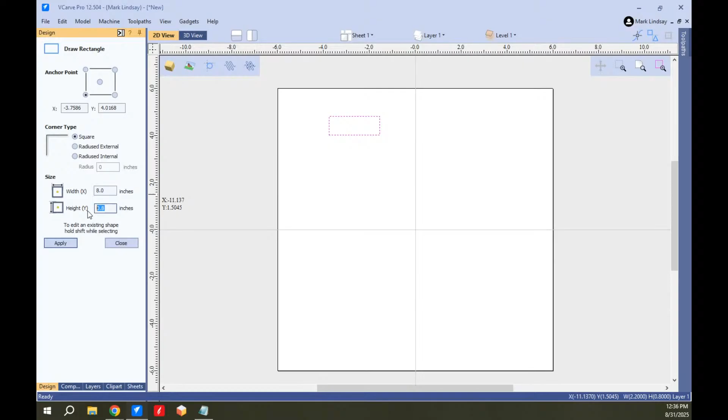Marvin says it's going to be 8 inches. All right, so here's what we'll do: 8 inches by 3/4 of an inch. Let's jump over to VCarve and I'll draw a rectangle, you can do this anywhere. I'll start a rectangle, then make the width 8 inches and the height 3/4 of an inch, 0.75, and apply it.

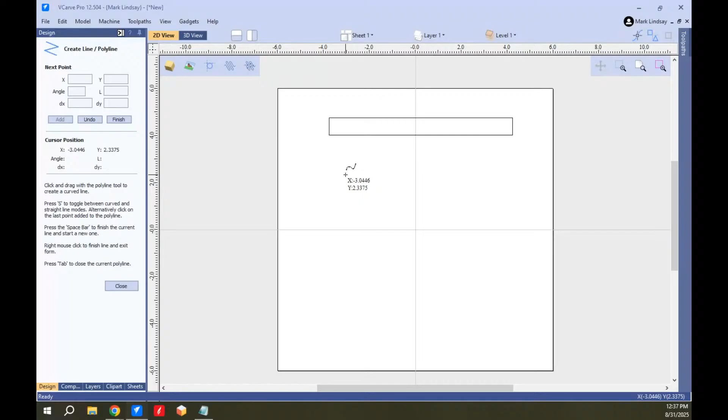So that's the length of this sweep, and that's the thickness of the material. Now I'm going to draw a vector, and you can see by my cursor icon that I'm drawing a straight line. I'll change that by tapping the letter S, and now I'm drawing a curve. I'll start up here at the top and bring it down to the bottom corner. Hit the space bar, and that finishes the line.

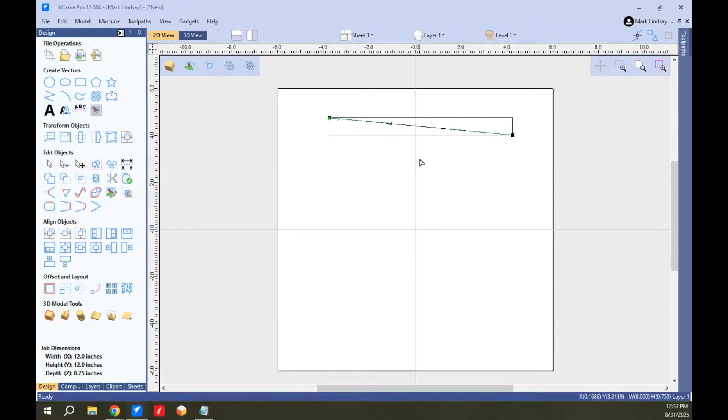Now that's a straight slope, but maybe you don't want that to be straight. Maybe you want a bit of a curve here. So I'll tap the letter N to go into node editing, grab this control handle, bring it up a little bit, bring this one up just a little bit, so I've got that shape. Tap N to come out of node editing.

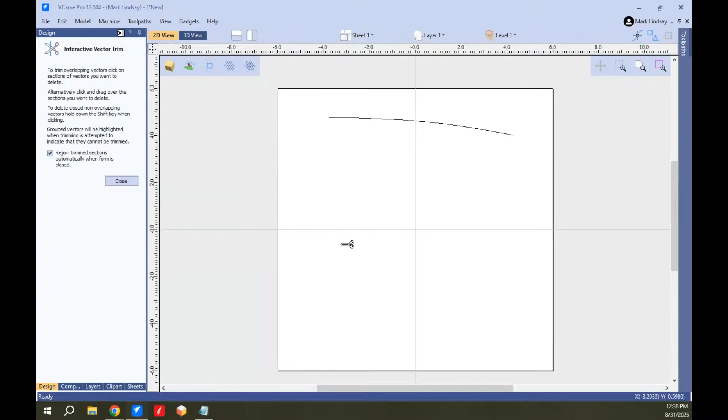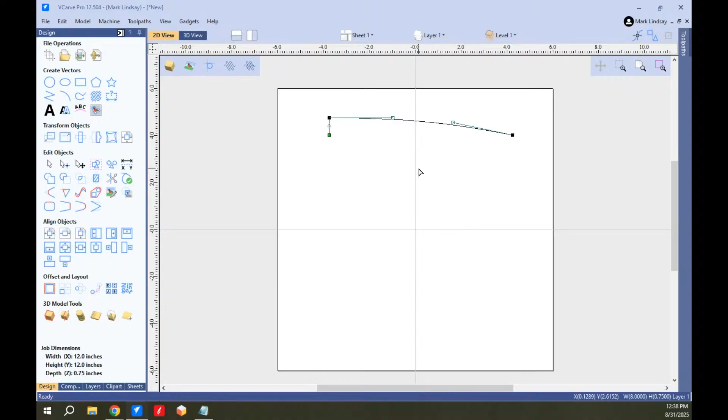Now I'll take my scissors and go snip, and snip. Let me undo that. I may need this leg right here. So I'll tap N to go back into node editing, and cut the vector right there. Then I'm going to delete this span. Delete span, there we go. Now I can come out of node editing.

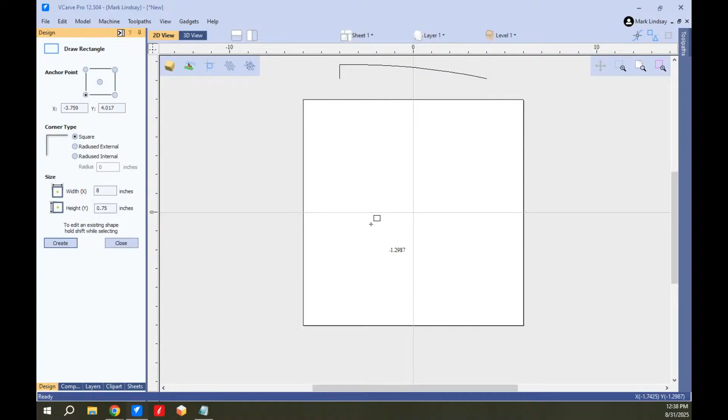That's my shape. Now I'm going to drag it up here so it's not on my material at all, getting in the way. My battle axe is being drawn out here somewhere, and I'll close it, then center it. This is going to be quick and dirty here.

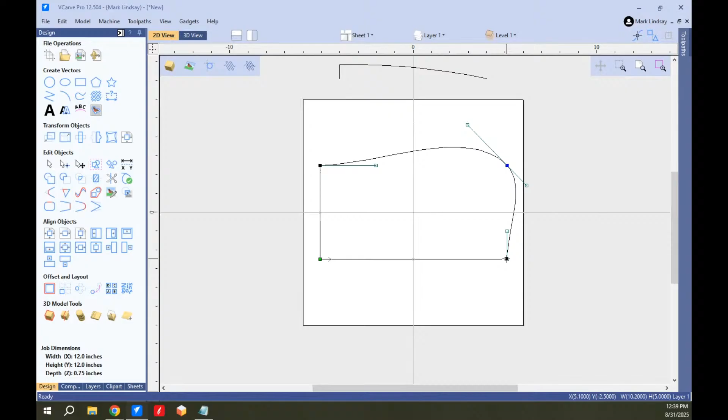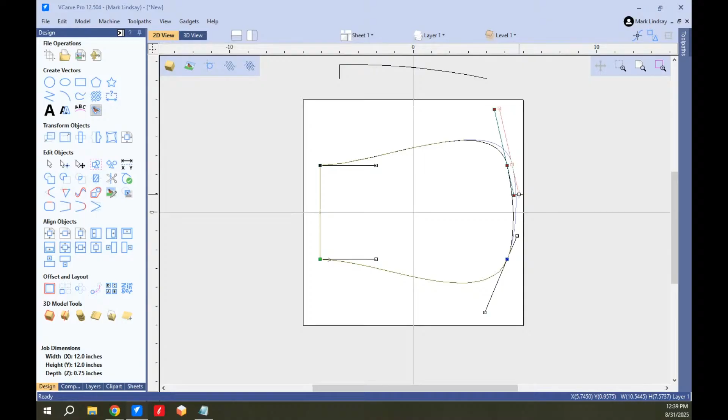Go into node editing. I'm going to smooth that point, smooth this point, and bring that in. Come on, bring that in. Bring this in. This is really, really bad, but you'll get the idea. Shaboom. Now come out of node editing. That really looks rotten, I know it looks rotten. I'm not an artist, okay?

So now the height here is what I need to be concerned with, because I'm going to have to sweep this edge all the way across and make sure I get that edge all the way across.

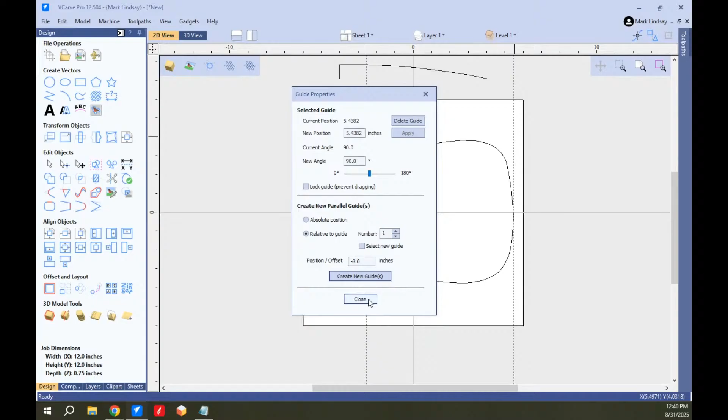So I need a couple of guides here. I'm going to drag a guide out, right click, and create a new parallel guide relative to this one. The position is going to be minus 8.0, so I want this guideline to be 8 inches back from this edge. Create new guide. Terrific. Now I can delete this guide, I no longer need it.

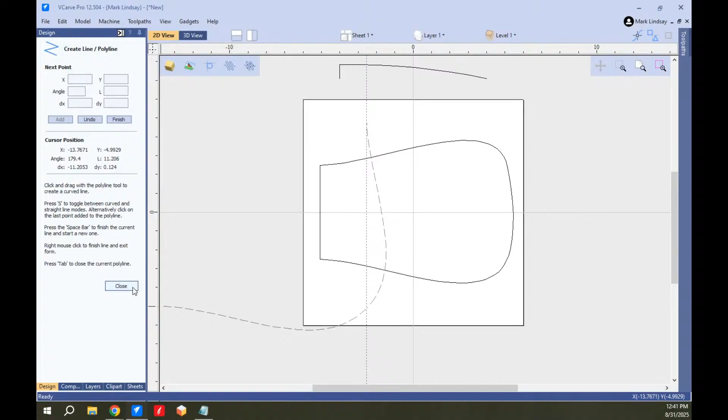This is where I need to draw a vector. I'll come out here and draw a single vector, making sure it's longer than this height right here. I'll click, click, close it, so I have that vector. Now I can delete that guide. Okay, I hope you're still following me.

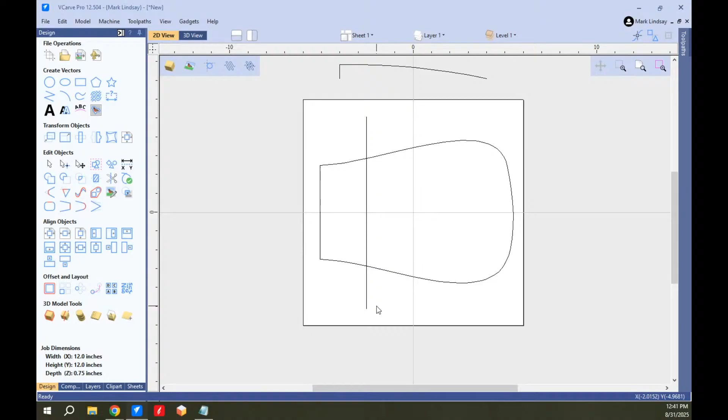This is the shape of my axe, and as you can see, it was made by someone in the Stone Age. This is my drive rail, and this is the profile I'm going to drive along that rail. So we'll select the drive rail first, hold down Shift, select the profile, and use the moulding toolpath.

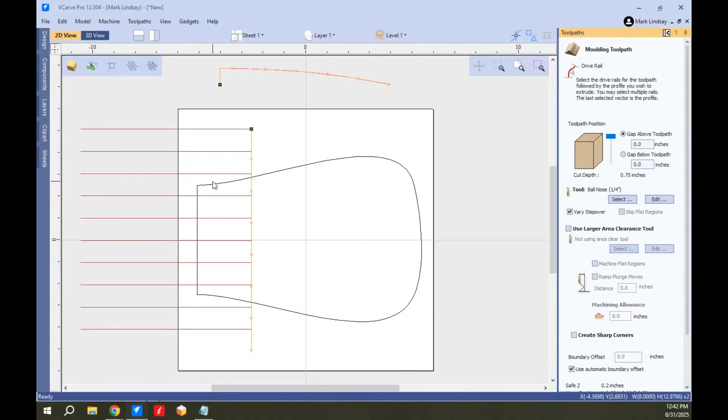Now here is my drive rail, and these little red flags show which direction this shape is going to be carved. Well, it's 100% backwards. We want these lines pointing over here, over this. So we'll put my cursor over this vector, right click, and reverse direction. Now we're driving in the correct direction.

Here's my drive rail, here's the profile I'm driving. Now we're going to come down here and look at the toolpath position. Our cut depth is 3/4 of an inch. That's fine, so we have no gap above this toolpath and no gap below the toolpath.

Now we're going to decide what bit to use. Are we going to use a ball nose and vary the step over? Let's try it and see what happens. Are we going to use a larger area clearance tool? I probably would. So in this case, just because it's me, I'm going to select an end mill and get aggressive. I'm going to use my 1/2 inch end mill to mill away the majority of this material, especially down here.

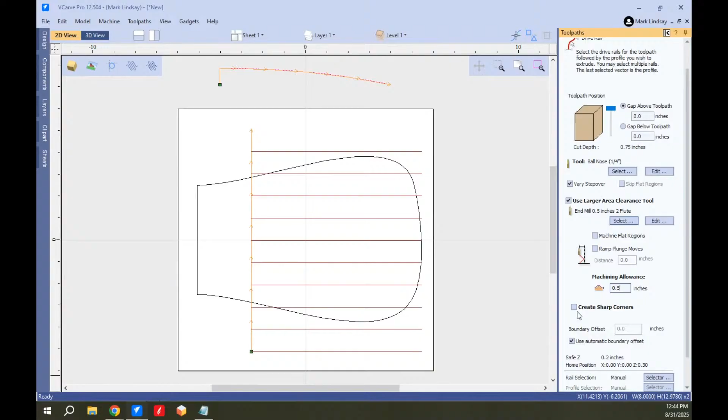Am I going to use a machining allowance? I'm going to go with a machining allowance equal to the tool's diameter, this tool here, of 0.5. What that's going to do is remove material a 1/2 inch beyond the length of this carve. Create sharp corners - I got no sharp corners. If you do have sharp corners, you'll want to check that.

Let's calculate. Right off the bat, we see we have two profiles, or two swept profiles. Now, the question about the V-bit - when I put my cursor over this title right here, that bubble pops up and tells me the maximum depth of this cut is 0.75 inches. It's the third line from the bottom, that's what I was talking about. Hopefully you can see that bubble, it'll go away in a minute. This one, same thing, the maximum depth is negative 0.2 inches.

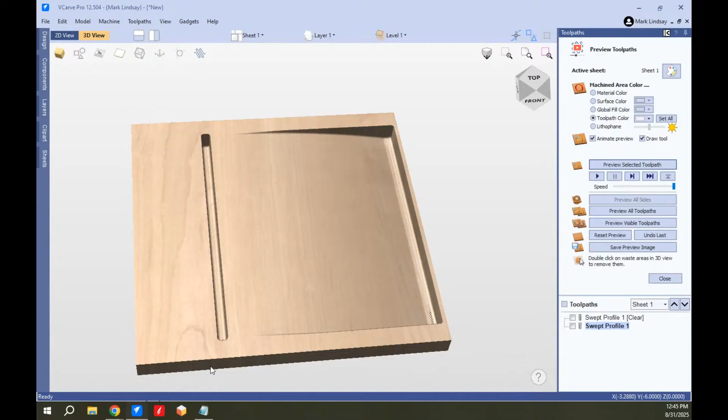Okay, alright. So we'll preview the clearance first. Let's preview this - my clearance didn't cut. Alright, there's that ledge. Turns out I don't need that ledge. We'll reset the preview.

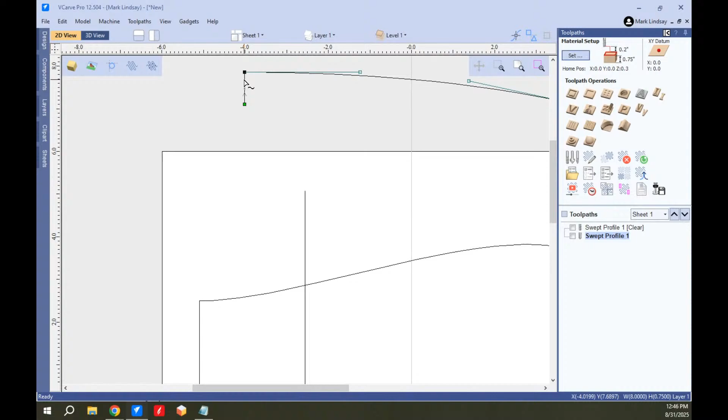Close this, I'm going to go back to the top. I'm going to go into my 2D view, go up here, go into node editing. Tap the letter N to go into node editing. And I'm going to right click, delete that span. I don't need it.

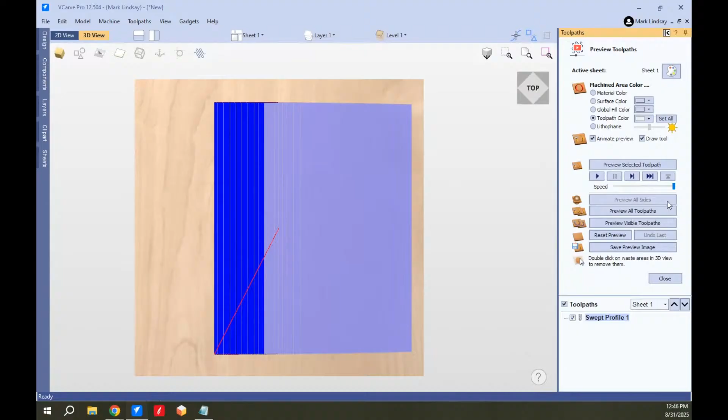Now I'll go back into that same toolpath. I'm not going to bother with the clearance tool. I'll recalculate it, and now I only have one toolpath. I'm not going to bother with that 1/2 inch bit. Now I'll preview that toolpath. And there is that curve, there is that radius.

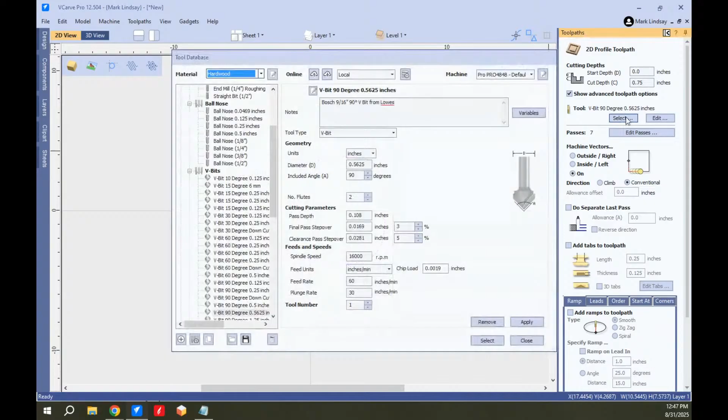Close 2D view, select this vector, do a profile, 0.75. I'm not going to use a 90-degree V-bit, that's silly. I'll use my 1/2 inch end mill. Select, and I'm going to carve outside the vector. For this demonstration I'm not going to worry about that. Calculate.

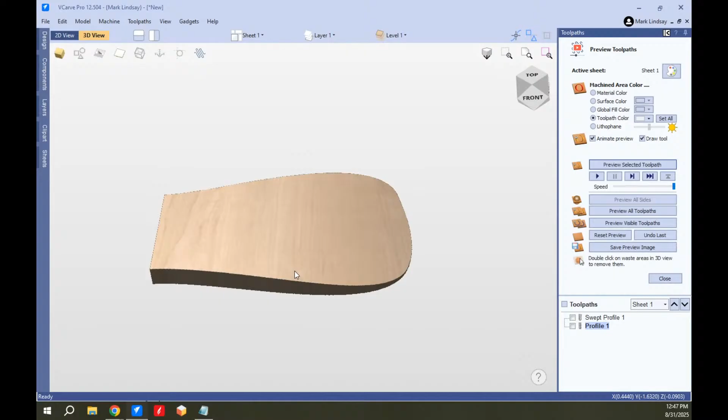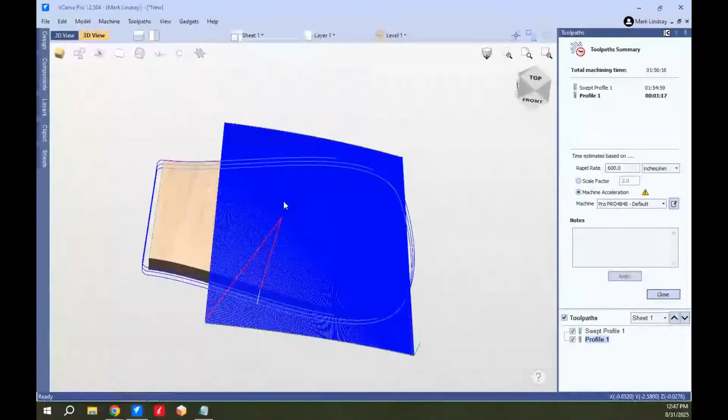And we'll preview that, get rid of my waste. And there's your edge, okay. That's how I would do it. Now let's go up here and see how long that's going to take. For me, this swept profile is going to take the longest - it's going to be 1 hour and 54 minutes, and the cutout's going to be 1 minute 17 seconds. That's my machine, your mileage will definitely vary.

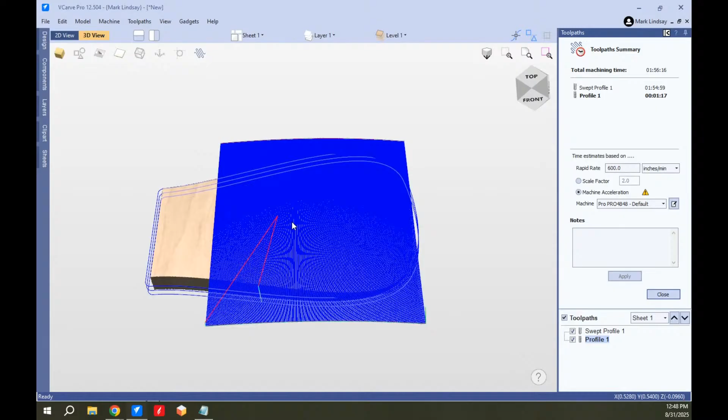The carve time on this is too high. Well, that may be. The point is, when you're using V-Carve, you are restricted, you are limited in what you can and can't do when it comes to carving something with this type of a contour. We tend to put a lot of emphasis on the length of time something's going to take, but you have to balance your priority. Is it worth it to you for a 1 hour and 54 minute toolpath? Only you can answer that.

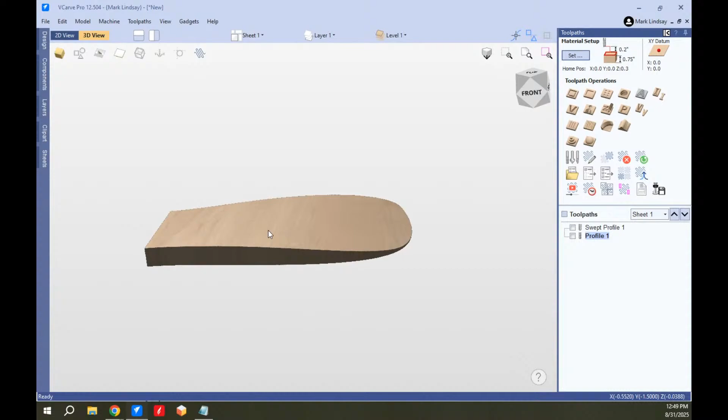I think it's a function of the machining allowance and not getting a clearing pass. That may be, Pete, that may be. But you have to decide. Personally, I don't know, I think I would sand that in with a disc sander, that's just me. CNC router is not always the best tool, but that's just me. With V-Carve Pro, you're very limited, is what I'm getting at. So there are other ways of doing this, but all of them involve 3D modeling.

Now there was another question up here. I had real trouble trying to use the molding on a circle this week, trying to curve around the profile and around a pocket in the center.

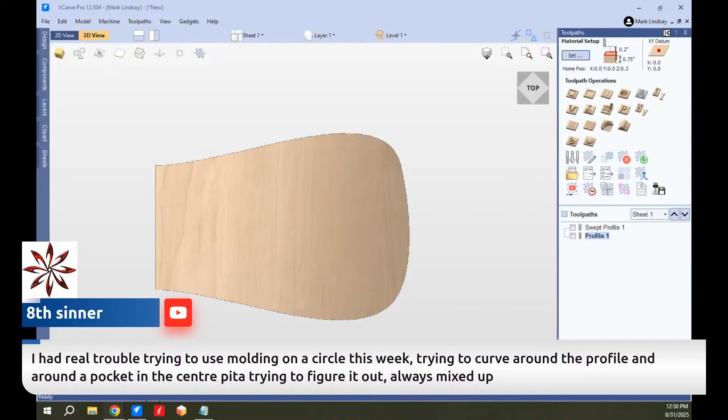Something that needs to be remembered is that the molding toolpath will only carve one way on a closed vector, so you'll have to break that vector up into open vectors to get it to cut. For instance, if you do a circle or a square on a closed vector, it will only project that shape to the outside. If you're trying to carve something to the inside, you've got to split it up into two vectors, so then it will carve to the inside.

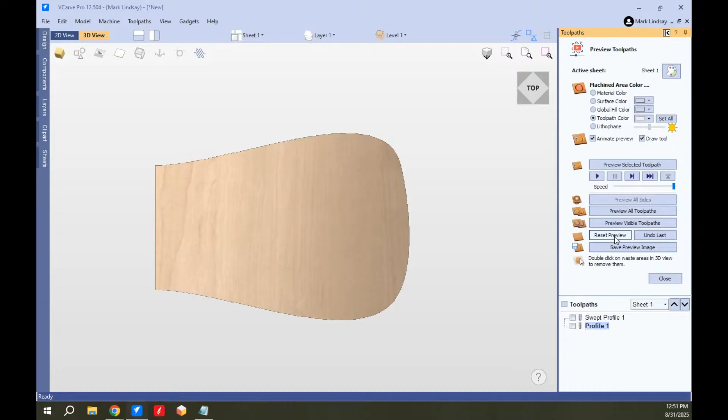John says maybe use the 1/4 inch. Yeah, for demonstration I will. Let's reset the preview, go back into my swept profile, use a larger area clearance tool, select the 1/4 inch end mill, and we'll do a 50 thousandths machining allowance.

Oh, I see what it was. Okay, I got that backwards. The machining allowance is how much material is going to be left for the finishing toolpath to clean up. I was thinking of boundary offset. So yeah, thank you for clearing that up, guys, I appreciate that.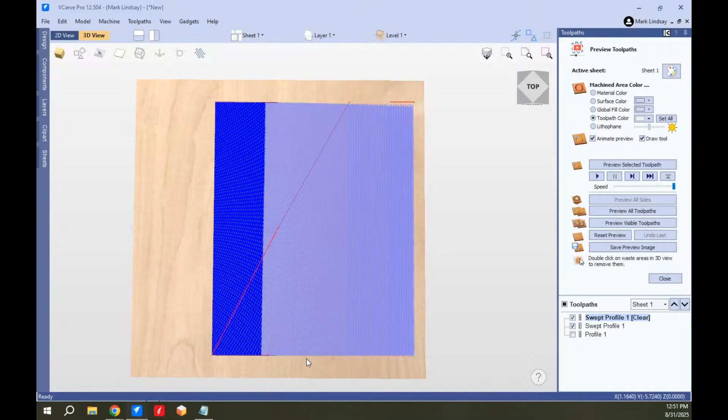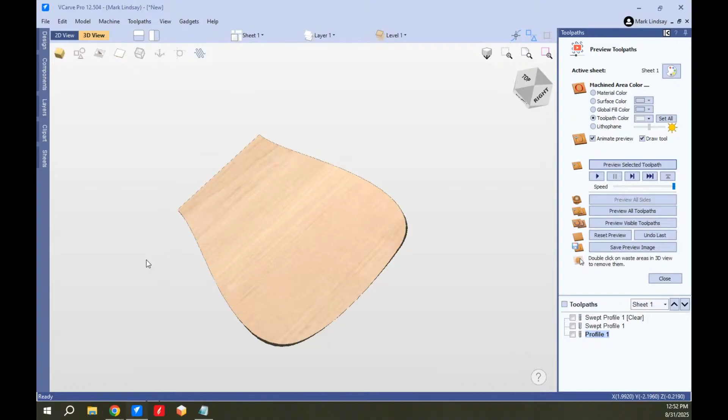So here's my clearance pass, that makes a lot more sense. It hogged out that material. Now we can do the swept profile, then the profile. We get the same result, but you see what I'm talking about. Yeah, that did work better.

And that is a sorry looking excuse for an axe. What can I say?

8 Center says that might have helped. In the end, I offset to the inside and guessed stuff till it looked okay. Yeah, you know what, I do that a lot.

Dwayne says he would use the curved vector for the drive rail and add the tail up on the lower end of the profile. Yeah, that was a down and dirty, quick and easy demonstration just showing you need a drive rail for the molding toolpath. It doesn't have to be a straight line, it can be curved, it can be a copy of the vector we're using for that shape, so you get the same profile all the way around.

Marvin's asking how do I put it on both sides. Same way I just showed you. You'll use two drive rails, select one to do that side, select the other to do that side. So you're creating two drive rails. You can use the same profile, but what I would do is mirror that profile, so two separate profiles, two separate drive rails. Do one, then do the other until you get used to it. Once you get used to it, you can do more complex setups where you've got one toolpath that carves both sides simultaneously.

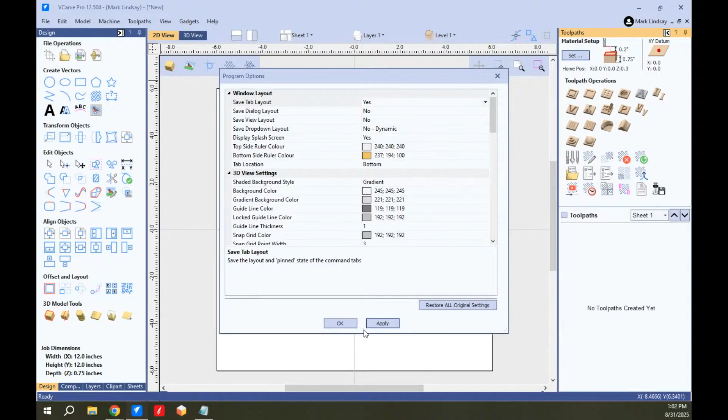Now when I come up here to Edit, down to Options, right at the very top, Save Tab Layout - this is a menu, I can click the arrow and select yes or no. I select yes, click Apply, then OK. Now when I shut down VCarve, nope, don't want to save changes. Click on a new instance of VCarve and it'll open like this. Now I've got to figure out what I'm going to do - I create a new file, it puts me into job setup, I figure out how I want that file set up, I click OK. Now both tabs are open from the start. You can set it up to do that and it'll remember it, but you have to tell it that's what you want to do. I prefer not to, I prefer to...

Sorry Rich, I hope you'll be there tomorrow because we're going to work on your question. Sorry, back to our show.

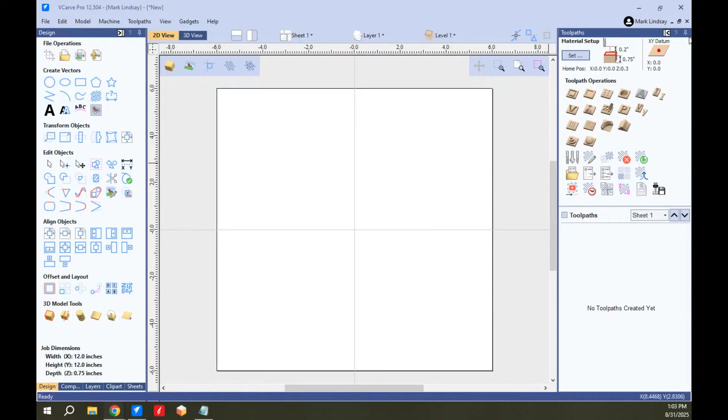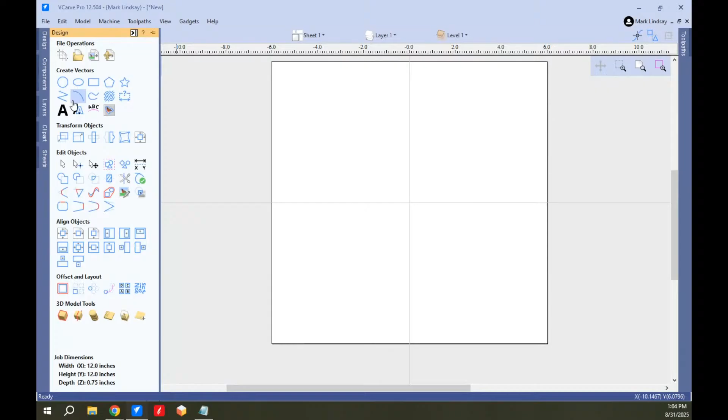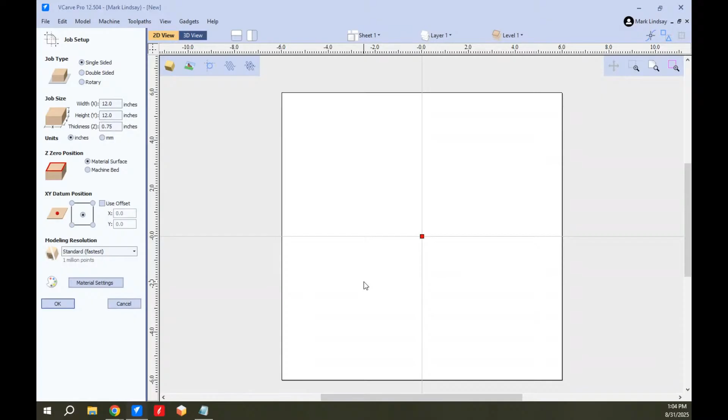I prefer to have this out here bigger than this, so I auto hide toolpaths, and while I'm designing, I'm out here. That way everything I've got has as big an area as I can get. Now you can also auto hide both so that you're working with this full screen, but you have to do this every time you want to change tools. So personally, I leave it pinned. Now because I made a change in my tab layout, I need to close VCarve, then open it again to make sure that tab layout was saved. Create a new file - okay, and my tab layout was saved. Sorry about that, I didn't mean to sit here looking this way and talk.

Okay, let's see. Yeah, I got a bunch of people. You're not sharing. I know the option is somewhere in the prefs, but in my best Scottish, I cannot find it, Captain. You cannot change the laws of physics.

All right. And along with Rich Bratcher's, say drive by, hi and bye. Yes, he will be here tomorrow.

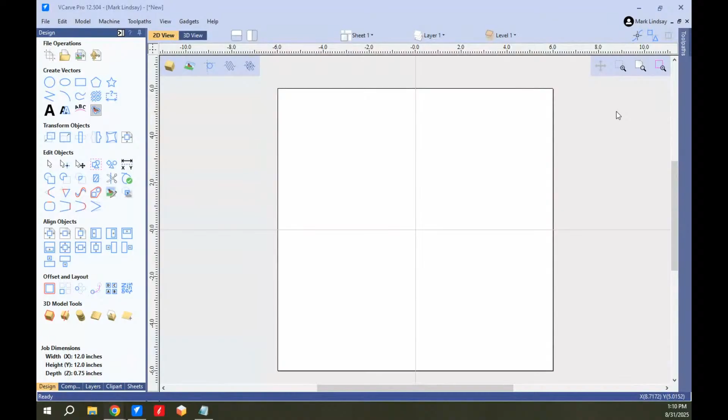Go over here. It's because in your finishing toolpath, you want to use a boundary offset that's equal to the diameter of your bit. So in this case, the boundary offset would be 1/8 of an inch, 0.125. What that does is cause the bit to travel past that boundary just a little bit, by that distance. So you've got a vector out here that you're using, your selected vector for the sake of argument. You're carving to that vector, and that vector is also your profile that you're going to use to cut out. Use a boundary offset equal to the largest bit.

If you have a 1/8 inch ball nose up here, or your 1/8 inch is the largest, and you have a 1/16 inch ball nose down here, use a boundary offset that's equal to it. What will happen is on your finishing toolpath, the bit will go beyond that vector by 1/8 of an inch, and that'll trim away all the flash before it has a chance to form. Then when you do your profile, you'll get a nice clean cut. So use a boundary offset equal to the diameter of the largest bit in your finishing toolpath.

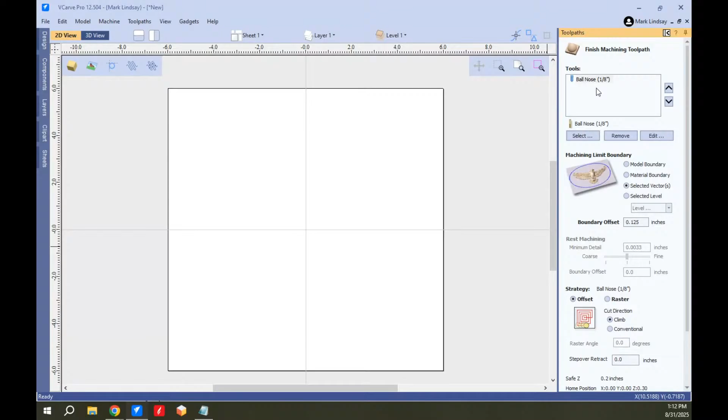Okay, let's see, I use my thingy-mabobber. That is a technical term, right up there with flooby-dooby. But you got to remember, is it a left-handed or a right-handed thingamabobber? Because there is a difference. It's subtle, but it's there.

Saw a guy last night on a stream say he was still running Windows 7. My podcast partner was running Windows 7 until just a few months ago when his computer finally started acting up, and he got a Windows 10 computer. Up until I got the Avid, this computer that runs the Avid is running Windows 10. It will not and cannot go online, either Wi-Fi or plug-in. If I hardwire it in, it can't go online. Not possible. That's going to stay running Windows 10 until it dies. Not an issue, I've got 2 other Windows 10 computers in reserve for this. But up until I got the Avid almost 3 years ago, I was running Windows XP. It is not on a network. It is a dumb terminal, basically. The only way to put files on it is with the magic thumb of thumb drives. That's the only way to transfer any kind of file onto that computer. So, and that's how I want it. That computer's sole reason for existence is to run that CNC router, and that's all it does. So there are no card games on it, no web browsers, no antivirus software. Nothing. You Mac people are hilarious sometimes, but not throwing shade, just saying it's different.